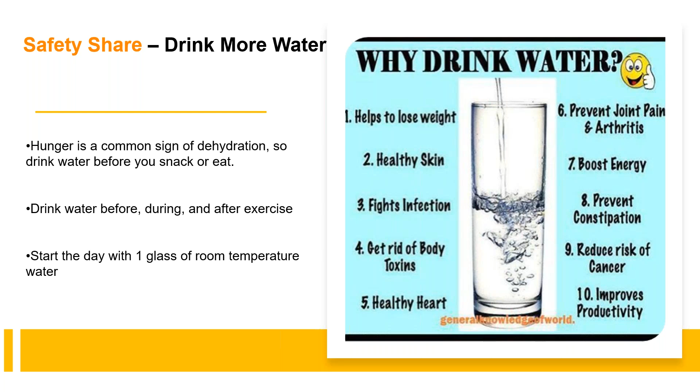What are some of the main health benefits of water? A couple of things that I think are really important: it helps get rid of body toxins, it fights infection, also reduces the risk of cancer, and ultimately it improves your daily productivity. So if I could urge anyone to add something to their busy schedule every day, start with drinking a glass of water. It helps you get your day started and your metabolism moving.

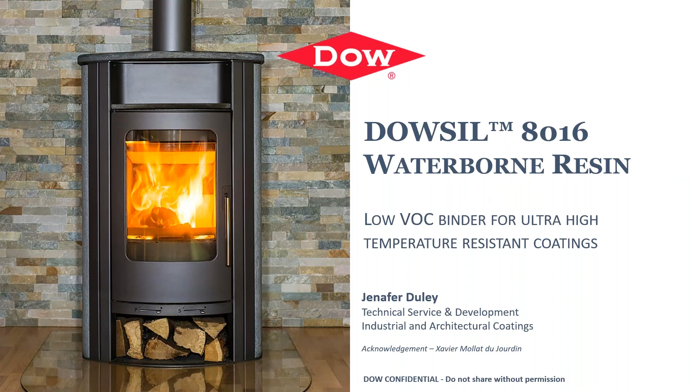Thank you, Rob. As mentioned during today's webinar, I'm going to introduce the DOWSIL 8016 waterborne resin that was launched mid last year. Then I'll expand upon what we previously divulged with some new silicone-acrylic data and formulation guidance. I'm going to start with a short overview of sustainability initiatives that are driving waterborne coatings innovation globally, emphasizing a really important unmet market need. All of this will be before I get into the meat of the presentation, which will highlight the delivery and performance profile of 8016, including high temperature pertinent formulation and performance guidelines. Finally, towards the end, I will explain a new silicone-acrylic study completed that further expands the breadth of possibilities when formulating with our 8016 waterborne resin.

There are global initiatives that have quickly driven Dow to develop sustainable solutions, and I'll take a couple of minutes to discuss some of them. Starting with the European Union, they introduced a set of regulations which prohibits the use of organic solvents in some paints, which forces more difficult formulation choices. In addition to already banning solvents in some of these industries, as part of the European Green Deal initiative, we expect to see new regulations coming to fruition based on the zero emission ambition over the next 10 years. Second, we look at China - they have implemented similar initiatives, which all essentially aim to control the emission of VOCs.

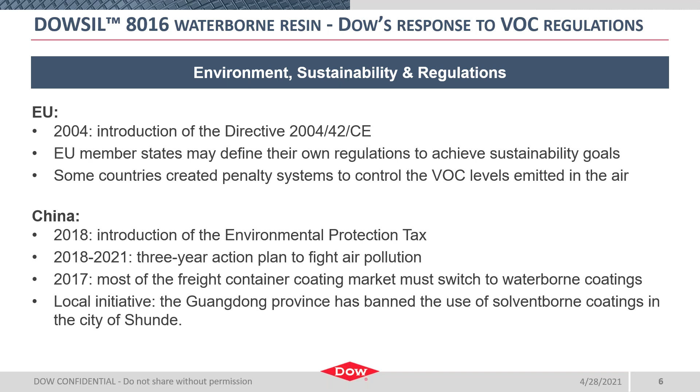We've also seen industry-specific standards enforced. The freight container coating industry moved away from solvent-borne coatings altogether back in 2017, and we have to consider the possibility that many more may follow in the future. All of this has the potential to impact businesses on their bottom line, and as a chemical supplier, it's vital that we continue to progress with these tightening restrictions.

Recognizing that global EHS regulations are driving formulators to use more sustainable solutions, we'll take a step back and consider what markets this impacts. We know that high temperature resistant coatings find utility in many industries. To list just a few we had in mind during the development of 8016 specifically: house appliances, including gas stoves, wood stoves and furnaces, ovens, barbecue grills and chimneys.

In the automotive space, we considered exhaust pipes and also the electrical and under-the-hood components. And then for general industrial coatings, pipes and processes operating at elevated temperatures will of course require those protective coatings to be high temperature resistant.

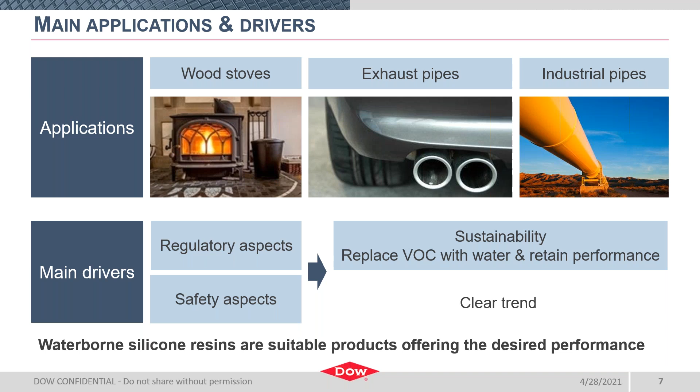In all of these applications, solvent-borne systems dominate today due to their superior performance. However, we do have this clear need for more environmentally friendly solutions. Consequently, the development of silicone-based waterborne high temperature resistant coatings is being more and more investigated. The challenge of this route has been and continues to be identifying or developing a formulation set to meet the demanding requirements. These performances are already mastered through solvent-based coatings, but pose a definite challenge for the water-based space.

By looking at the safety and technical data sheets, it is known that the products still contain solvents, some even containing benzene, toluene, and xylene solvents, which of course aren't getting any friendlier. In addition to the literature, when formulating with the benchmark materials to gauge performance, the smell made it very clear that there was solvent inclusion.

The amount of solvent included in these various products significantly impacts their flammability rating, unfortunately, which really contradicts a large reason for using waterborne resins to begin with. And when I say products include solvents, I mean all species which would be intentionally added in the product, not the byproducts of hydrolysis or condensation reactions involved in the curing mechanism.

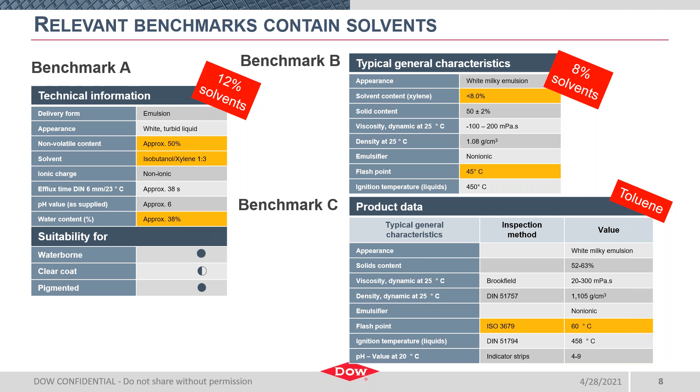In contrast to these benchmark products, and to address the market need for an actual waterborne high temperature resistant resin, 8016 is delivered truly solvent-free and provides very good film formation on its own, which eliminates the need for even a coalescing solvent. Now I will get into the 8016 waterborne resin.

The intent or goal when developing this resin was to compete with or match performance of the traditional solvent-based silicone resins, in that it would provide high temperature resistance above 500 C. And that's really just what this resin does.

I could elaborate on target markets and applications for 8016, but a simple way I want you to scope out where it may have utility is by identifying high temperature needs today that are either moving away from solvent-borne paints, requiring lower VOC, or pushing for waterborne delivery altogether.

Among the main features, I'll first reiterate its EHS benefits. It's very low VOC and truly waterborne without solvent inclusion. It also contains a low cyclic siloxane content of less than 0.1% and has a high flash point, which omits the flammability label on the SDS.

The 8016 doesn't necessitate the use of added coalescent solvents in paint formulations, still securing good film aesthetics without that, and subsequent film performance, which allows for even lower VOC formulating.

Beyond the clear EHS benefits, DOWSIL 8016 waterborne resin provides high temperature resistance and can be applied directly on metal with excellent adhesion. Paints we've made with the 8016 have yielded very hydrophobic films, which is advantageous to minimize the generation of corrosion in heavier duty applications.

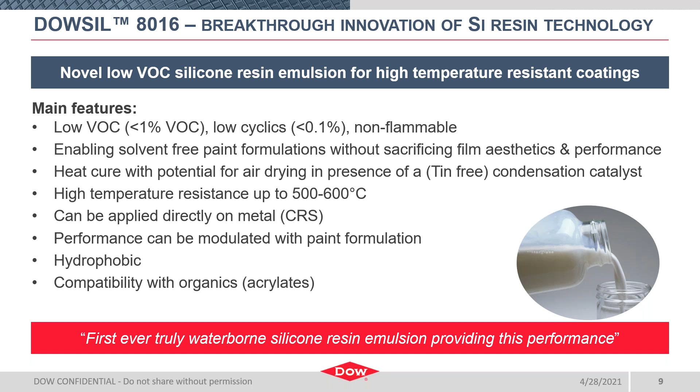In our 2020 launch of 8016, we had initial indications of this compatibility and potential for a broader range of coating performances, but we didn't really have in-depth data to share at that time. So since that initial launch, we've dug deeper into this, and I'm going to highlight some of the data collected on these systems towards the end of this webinar.

The delivery of 8016 resin is consistent with your typical emulsion. It's a milky white liquid. It is pourable, low viscosity, enabling ease of incorporation, and it is stabilized at moderately high pH. The recommended storage conditions and shelf life are also very consistent with other waterborne delivered products.

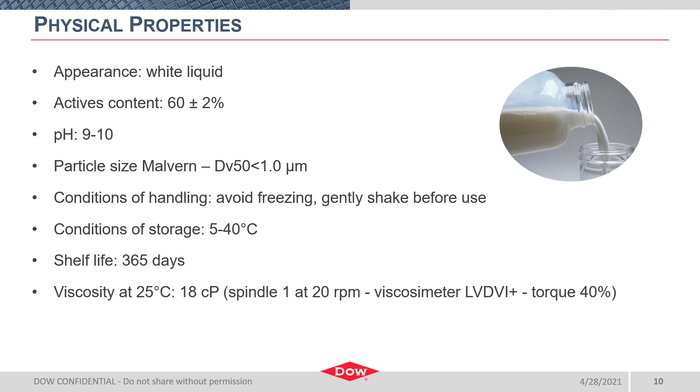When considering the delivery, the differentiation is really on the solids content. 8016 resin is delivered at 60% actives, where your typical acrylic emulsions are going to range between 45 and 55% actives. By delivering this emulsion with higher actives, we're giving formulators the option for higher solids formulations, and we're also shipping less water in every container.

This is a generic paint formulation, which was specifically designed to satisfy the performance needs for an oven cure application. As you can see, it contains most of your traditional high temperature paint components. 8016 is going to be the only resin in a lot of the data I'm going to share today, again, to address those ultra high temperature needs.

The black pigment dispersion includes a blend of oxide functional pigments, which is very common and required for high temperature resistance. The functional filler we've included is silica. This is necessary for initial wet and dry adhesion, and then more importantly, post-heat adhesion.

Of course, you can include other fillers. For example, you can include other reinforcing types, or you can include carbon black at low levels if needed. I've seen this included for jetness or color specifications, but it's not going to be a recommendation, as carbon black doesn't really add to silicone resin function or performance.

The additives in the formulation include 8590 additive as a defoamer, the DOWSIL 67 additive used for wetting. This further helps eliminate the need for coalescing solvents. And Acrysol ASE 60 is the rheology modifier we've developed into this formulation. It's recommended at a very low level, which again is common for water-based paints.

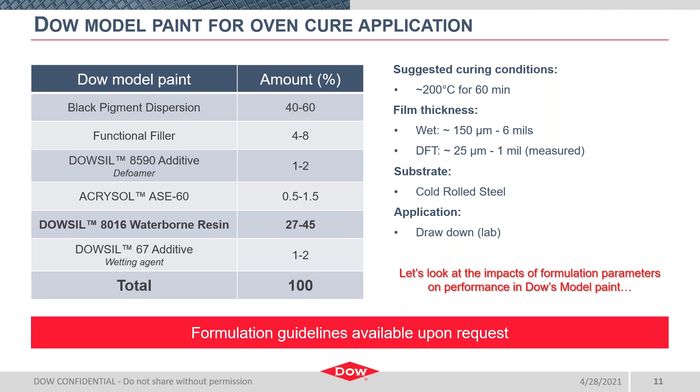Before I dive into performance, I should mention that results presented today include paints cured in an oven for an hour unless otherwise noted. All coatings were applied as single coats direct to metal on cold rolled steel via drawdown, so consistency was maintained.

Here's a quick snapshot of the performance of an 8016 base paint, comparing a 200 degrees Celsius cure to a 230 degrees Celsius cure. I'm starting to understand whether cure temperature has an impact on film performance. For both films, we measured pendulum hardness, and pre and post heat adhesion according to the DIN method 2409.

The degree of chalking was assessed by simply rubbing the surface of a coating after the high temperature exposure. Film cohesion was measured by the amount of dust or material peeled off during the post heat adhesion tape test. And delta E, or color change, was calculated between a cured film and then a film that had been exposed to heat. We also looked at humidity and water resistance, but I'll share that data on a later slide.

The post-heat data for this slide and all other data I'll share indicates it was exposed to 500 C on a hot plate, to simulate what the coating will see in a real-world application.

Looking at the table summary, the visual appearance of the film was excellent regardless of curing conditions, and the pendulum hardness in both cases was slightly over 100, which is very typical for a high temperature paint. The adhesion before and after exposure to heat, as measured by loss of material, was excellent and really independent of cure temperature.

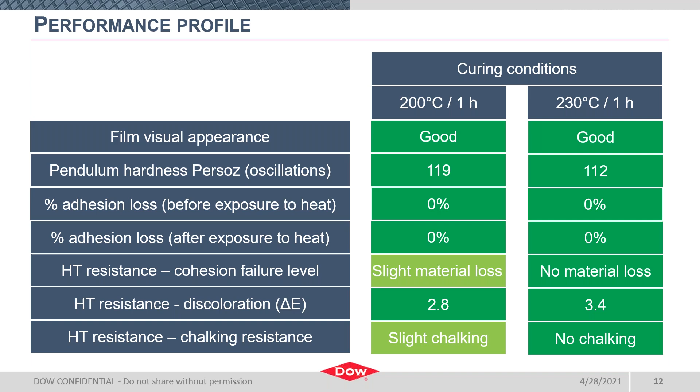Here's an example of what the 8016 based paint looks like before and after exposure to high temp. Both of these panels were cured at 200 C for an hour. The right panel was then exposed to 500 C on a hot plate. Neither sample has visual defects or chalking, and film integrity is excellent for both pre and post heat exposure. The sample exposed to 500 C on the right only shows slight discoloration, as mentioned on the previous slide with those numbers - it's just over that visually detectable limit.

This color loss is almost inevitable. It's mostly from pigment oxidation and organic substituents burning off of the silicone resin. But it's very interesting to note that we actually observed the color revert closer to its initial profile once all of these organic substituents have pyrolyzed from the resin, which makes sense as degradation of organic composition can exhibit a yellow tone. When those components have all burned off as carbon dioxide and water, they're no longer there to show any discoloration or minor degradation.

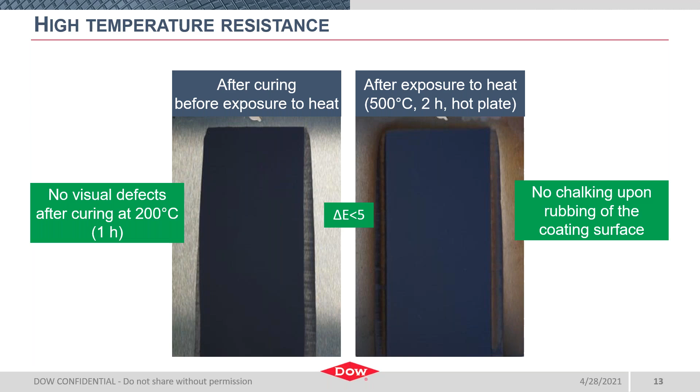The level of film cohesion was also assessed based on the amount of material removed with Scotch tape during the adhesion test. Since this adhesion test on the substrate rated 5B, or nearly perfect, we were able to visually assess the amount of cohesion by material on the tape. Had we had a less than perfect adhesion rating, we may have worried that the material on the tape was adhesion failure, but this wasn't the case, so we were able to look at cohesion this way.

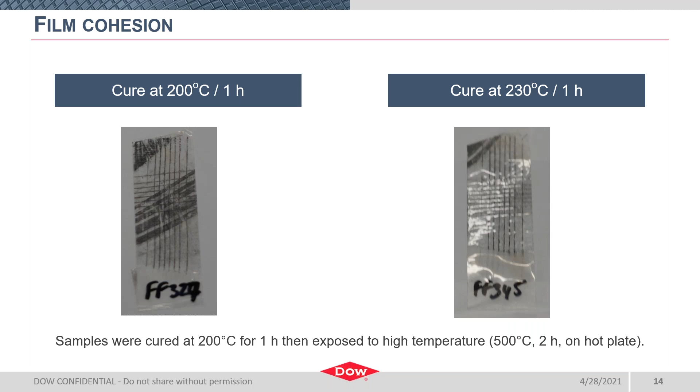This performance property was evaluated for 2 coating samples cured at 200 C, shown on the left, and 230 C, shown on the right. While 200 C is sufficient to cure the film for many performance properties already outlined, the film cohesion was improved slightly when the curing temperature was increased to 230 C. This gives us some flexibility in formulating an application depending on the desired performance.

Continuing to talk about cure temperature, this is a more holistic view of the influence of cure temperature on coating hardness or film development. Aside from our theory-based recommendations and historical guidelines, this gives us a good idea of the temperature range required to trigger that full cure in an oven by measuring hardness. On the y-axis is the pendulum hardness, and on the x-axis is the curing temperature, increasing left to right. For all of the cure temperatures in the study, the cure time was held constant at 1 hour, so consistency was maintained again.

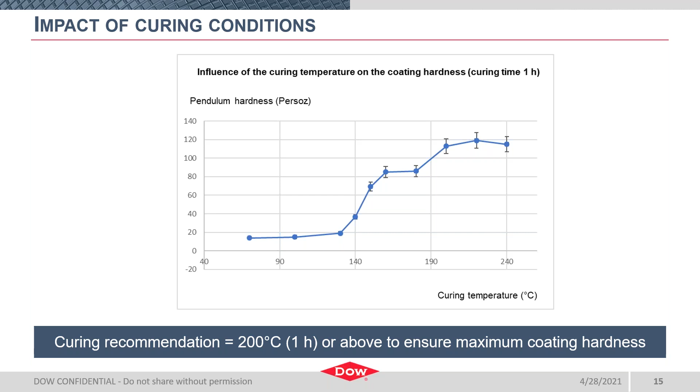Up to 130 degrees Celsius, we see relatively no curing taking place, and the film hardness remains low. We don't see that hardness development really start trending upward until we get to 130 to 160 degrees. And then, of course, we look for that point where we see a plateau, or the point of diminishing returns around 200 C. So this is going to be the genesis for our oven cure recommendation.

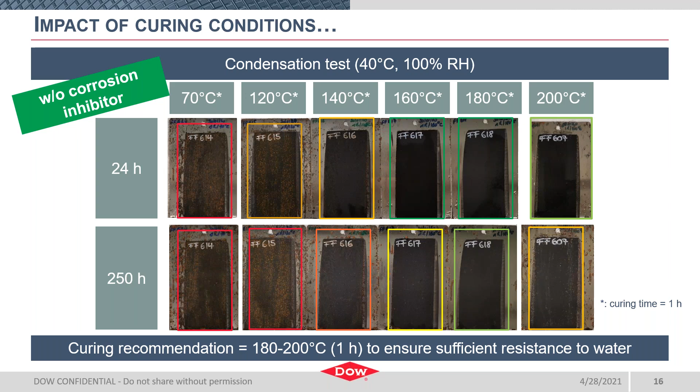Another formulation parameter we dove into was PVC. As we know, this has a direct impact on paint performance. To simplify, I show variation in pigment to binder ratio from 1.2 to 2.8, with 1.8 as our relative chosen midpoint. For all formulations, we assessed color change, adhesion, chalking, and film cohesion after the high temperature exposure. The left column shows performance for the lowest pigment to binder ratio tested of 1.2, the middle column 1.8, and the right column is your highest pigment loading level with a pigment to binder ratio of about 2.8.

All the test specimens were cured for an hour at 200 C, followed by that 500 C exposure on a hot plate. The color retention does remain fairly consistent, but we did see that having too low of a PVC can significantly impact that film cohesion. And you'd say, let's increase PVC. So while the higher PVC improved the adhesion and subsequently cohesion, it appears that this high PVC formulation did tend to lead to chalking of the coating surface. So what this does is give us a good idea of how we can tailor that pigment loading to tweak performance.

Hence, while the recommended pigment to binder ratio is going to depend on the desired performance, in general, 35% binder in the dry paint, or in this case, 1.8 pigment to binder ratio, did maximize the overall coating performance, including that adhesion to cold rolled steel.

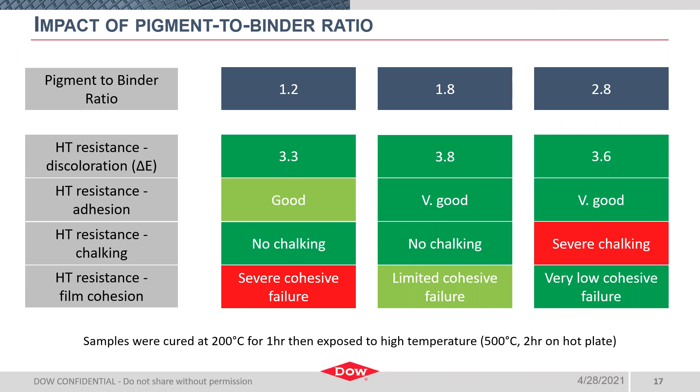To put a face with a name, so to speak, here are the pictures of formulations with varying PVC I summarized in the last slide. The formulations did not contain a corrosion inhibitor again, and were cured before being placed into the chamber at 40 C with 100% relative humidity. The left three pictures are the 24-hour exposed samples, and the right three pictures are 250-hour exposure.

Each exposure time set here shows pigment to binder ratios of 1.2, 1.8, and 2.8 as you move from left to right. The common trend between these two exposure times is that as you move from right to left, we see better performance, or better water resistance. In other words, as you decrease pigment to binder ratio, you improve the water or humidity resistance in this case. This is mostly expected, confirming that the PVC of the paint can significantly impact the porosity of a coating film. Of course, this is always going to depend on other formulation parameters, but this optimized pigment loading level is represented in that starting point formulation that I shared at the beginning of the webinar.

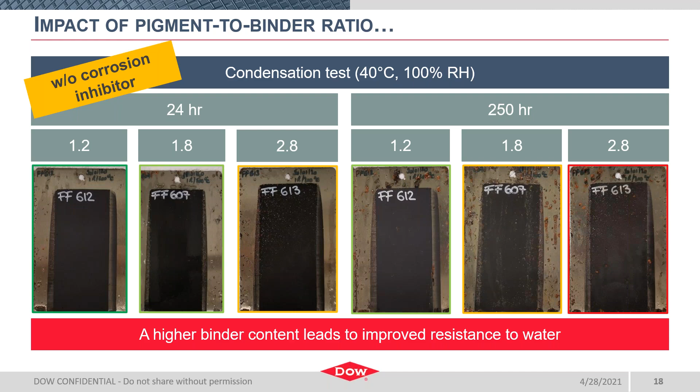In addition to PVC and pigment to binder variations, we also looked at pigment to other functional filler ratio, in this case silica, as we know this will also impact coating performance, specifically after exposure to heat. This graph depicts how pigment to silica ratio impacts the color retention of a coating after exposure to 500C, with y-axis being delta E, or color change, and x-axis being that pigment to silica ratio increasing from left to right.

As delta E increases, the color change is more pronounced, so a lower delta E is preferred. From the chart, if you follow that trend line from right to left, silica loading increases, and this correlates to more discoloration of the coating after heat exposure. The discoloration doesn't really stop changing until we hit a pigment to silica ratio of about 2.5, at which point delta E remains low, which is desired.

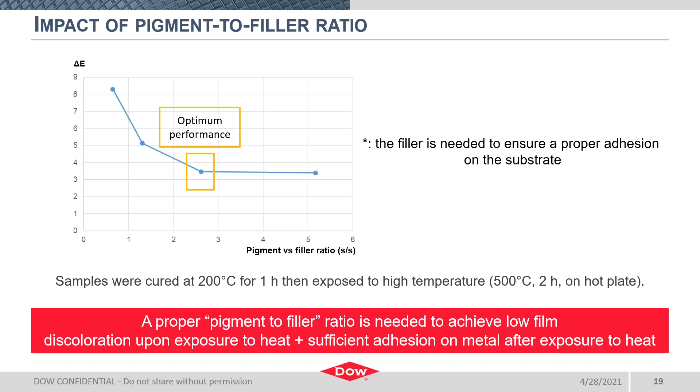Although it appears that eliminating the silica altogether would maximize heat resistance and color retention, our testing indicates this formulation does require at least some silica for initial and post-heat wet and dry adhesion to a steel substrate. So if we want to minimize color change and maximize post-heat adhesion, a pigment to silica ratio of approximately 2.5 gives us that best balance.

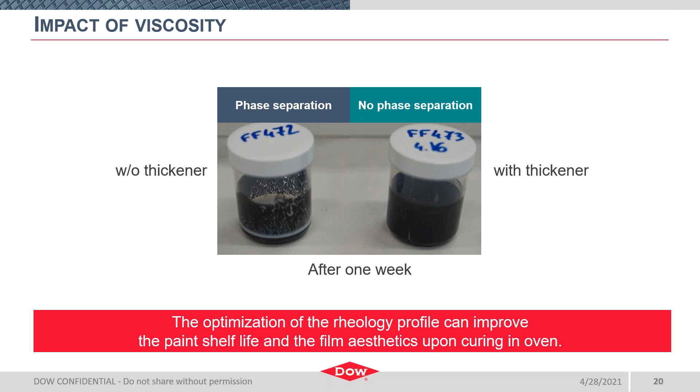As typical in water-based paints, adding a rheology modifier improves the stability of the paint. There are two samples shown: the left does not include a rheology modifier, and the right sample includes that ASE 60 rheology modifier. Without the thickener, shown in the container on the left, phase separation is observed, which in turn could impact your film homogeneity and aesthetics and would probably require more mixing before use.

To conclude this portion of the webinar, showing performance of the 8016 waterborne resin as the sole binder in a high temperature resistant paint formulation, I want to highlight the performance benchmarking we completed. The benchmarks are the same products I highlighted at the beginning of the presentation - reminder, these are the three products that all contain some level of harsh solvent.

For consistency, all coating samples here were drawn down on cold rolled steel, cured for an hour at 200C, and the formulation components and parameters were also held constant, which includes that pigment to binder and pigment to silica ratio. The only variable here is the binder type or binder composition. The high temperature resistance was then assessed of the 8016 against these three benchmark products by measuring adhesion, chalking resistance, and pendulum hardness. Among all of these products, the DOWSIL 8016 did exhibit the best overall performance.

If we look at hardness first, although this isn't always a definitive test to indicate performance - I know I've formulated high temp coatings with pendulum hardnesses ranging from 80 all the way to 140 - there is one obvious outlier here, and that's that second benchmark product showing a significantly lower hardness.

We also didn't see material loss with the tape adhesion test in the 8016 formulation, whereas all the other competitive products show some material removal, and in the sample on the right, quite severe material loss. In addition to the excellent adhesion, no chalking was detected with the 8016, while all the competitive benchmark products did show a varying degree of chalking.

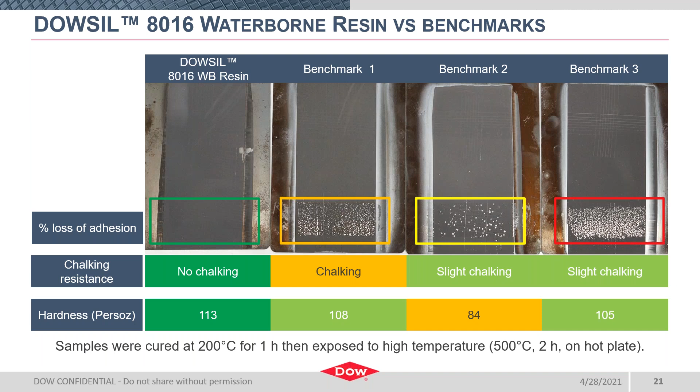So when taking the performance and stellar EHS profile into consideration, the 8016 is going to be the clear champion in a race between its incumbent competitors.

I will now take a step in a newer direction, looking at the silicone-acrylic blends, as we've had significant interest in the hybrid space since the initial launch of 8016. We knew from our initial experiments that 8016 was indeed compatible with many acrylic emulsions and have since been able to prioritize quantifying the space.

For our initial silicone-acrylic study, I chose 2 Dow MAINCOTE acrylic emulsions that find utility in the industrial direct to metal space already, those being the 5045 and 4950 emulsions. I held the formulation consistent for the data I'll be sharing over the next couple of slides. The optimized pigment to binder and pigment to silica ratios from the high temperature studies were used for all these formulations. Therefore, for the comparison I'm going to show, I only looked at varying silicone to acrylic ratios so I could best understand and quantify the potential synergy between the 8016 and acrylics.

Testing completed included dry and wet crosshatch adhesion after several curing or drying protocols, which encompass the traditional testing schematics for silicone and acrylic paints. These included adhesion after ambient cure or dry at 24 hours and at 7 days, and then your traditional silicone heat cure cycle of 200 C for an hour, and after high temperature exposure at 325 C for approximately 1 week.

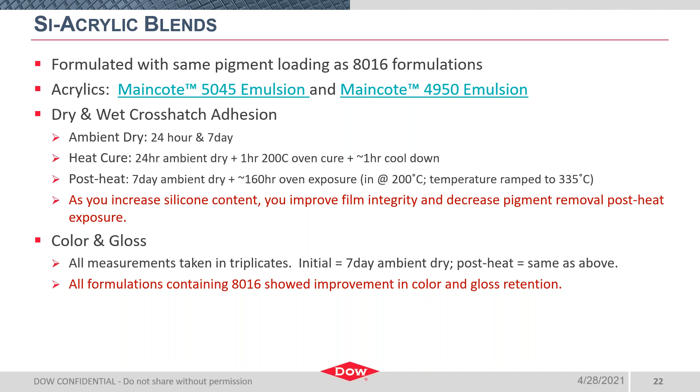Simply put, as you increase the silicone content in either acrylic emulsion, you improve the film integrity, the adhesion, and you decrease pigment removal or improve cohesion post-heat exposure. And all formulations containing 8016 did show an improvement in color and gloss retention. Of course, all of this is expected - as you add more silicone, you have better heat resistance. So I'll share now the level of improvement.

For adhesion data, we collected this according to ASTM D3359-17. To simplify the charts, I left off our heat cured data as all of the heat cured formulations showed excellent adhesion. The tables here show 2 acrylic emulsions in the top row, the left table being Maincote 5045 emulsion, and the right table is the data for Maincote 4950 emulsion. From there, as you move down, you increase the level of silicone content. So each table shows the same 25, 50, and 75% silicone modified of that respective acrylic before displaying on the bottom row the all silicone formulation, or 8016, performance without acrylic.

This view gives a really nice illustration, in my opinion, of the obtainable performance spectrum, starting from that pure acrylic formulation, increasing silicone content, and then showing 8016 pure silicone-based formulation at the bottom. The color coding is done via conditional formatting by column. What this means is the 24-hour dry adhesion is compared to other 24-hour dry adhesion results in that column and is not compared to the 24-hour wet results or 7-day results, for example.

And the trends observed were consistent between the acrylic binders. It is confirmed here that both acrylics do have excellent adhesion to cold rolled steel after 24 hours and 7-day ambient dry. Where they're going to need a boost in performance is in that post-heat adhesion. This was very low or even non-existent in the case of 4950.

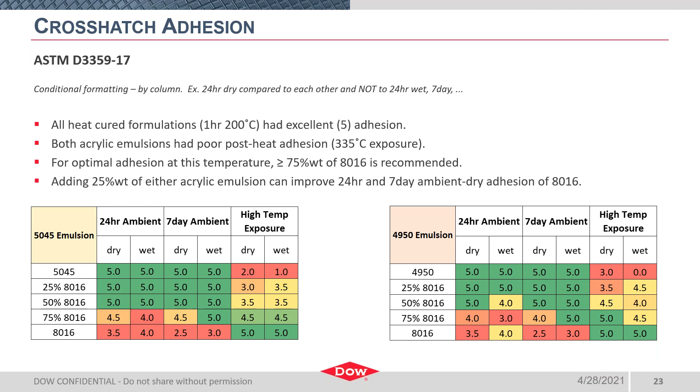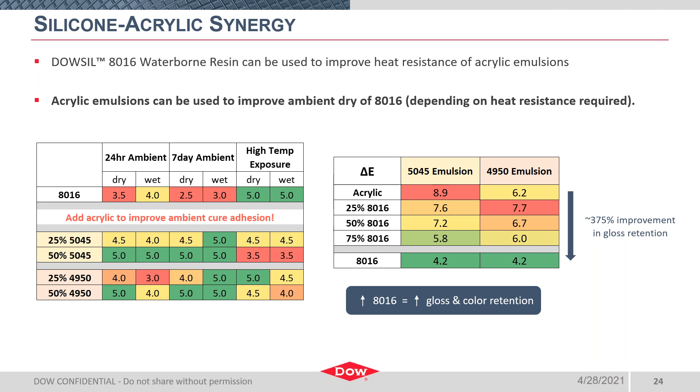In both cases, when just 25% of that silicone binder was replaced with the acrylic emulsion, the 7-day ambient dry formulation showed much better dry and wet adhesion without surprisingly drastically compromising the post-heat adhesion. So this further allows us to broaden our reachable application space now that we know that spectrum of silicone acrylic performance.

Okay, I have reached the end of the data sharing for the webinar, but I do want to quickly wrap up by concluding a few take-home messages. The DOWSIL 8016 waterborne resin addresses a previously unmet market need for a silicone resin that is truly delivered in water-based form without solvent inclusion that can compete with the traditional solvent-based silicone resin performance. In addition to the excellent performance, 8016 eliminates EHS concerns inherent to solvent-based resins and allows for even lower VOC formulating. Unique to the 8016, I talked about its excellent compatibility with organic binders.

Today we covered the acrylic space specifically, and new to this venue was the release of this information, which serves as a really good foundation for the wide range of obtainable performances. This is going to enable us to provide data-based formulation recommendations for light, medium, and heavy-duty industrial applications.

With the evolution of DOWSIL 8016 and the breadth of knowledge within technical service groups, together Dow and Univar are positioned as preferred partners when it comes to the development of innovative and sustainable solutions. And you can find literature on 8016 at dow.com, and samples are available upon request.